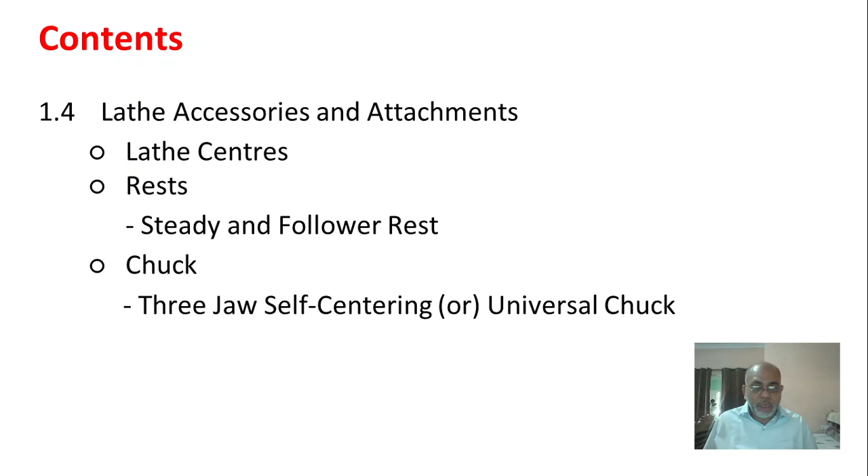I am going to present today the topic of lathe accessories and attachments. Here, lathe accessories and attachments, then lathe centers, then rest, then steady rest and follower rest. Then we have got chuck, three-jaw chuck, self-centering chuck, or it is also called as universal chuck.

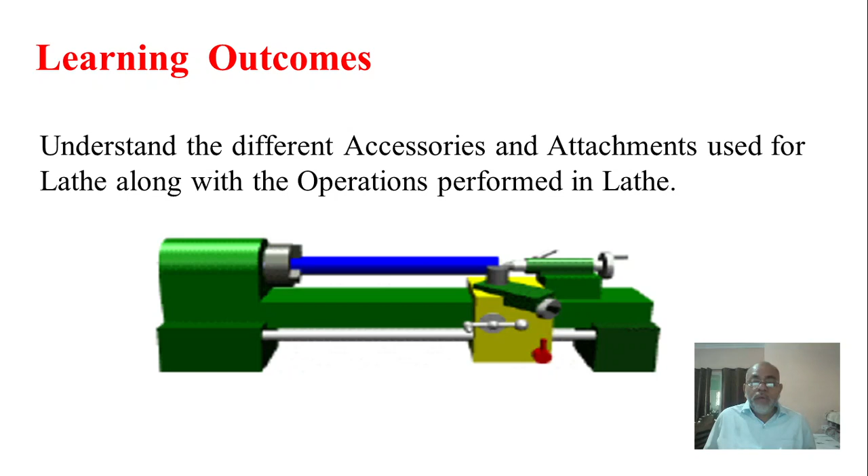So today, what are the learning outcomes? We will understand the different accessories and attachments used for lathe along with the operation which we are going to perform in a lathe. First, what are these lathe accessories and attachments? Whenever we purchase a lathe, the supplier will always give us accessories and attachments along with the lathe.

The lathe accessories are used for holding and supporting the work or for holding the tool during doing some specific operation. These include centers, catch plates, carriers, chucks, collets, angle plates, mandrels and rests.

Then attachments. What are these attachments? The attachments are additional equipment used for specific purpose. They include stops, thread chasing dials, taper turning, milling, grinding, gear cutting, turret, etc. When we are doing some specific operation, we make use of accessories and attachments.

We have got a headstock in a lathe and a tailstock also. The headstock is always located at the left side of the lathe, whereas at the right side we have got the tailstock. We are holding the job in the headstock or the chuck. In the headstock we have got the chuck and there we are holding the job. At the right side we have got the tailstock, that is also known as the dead center.

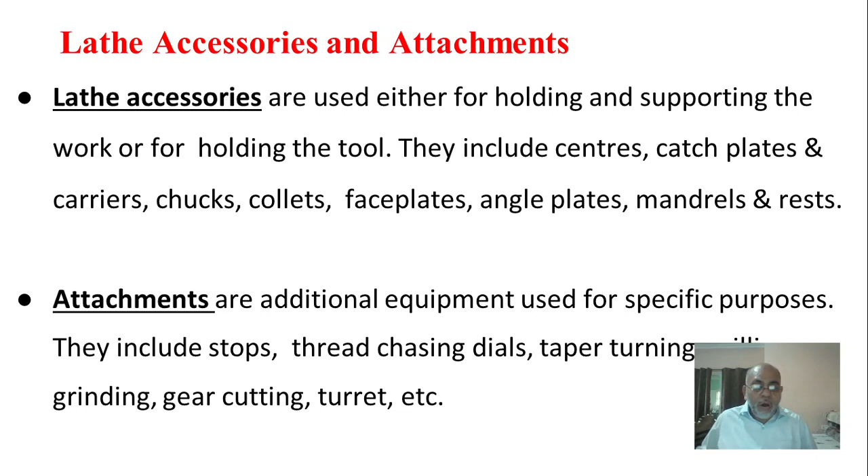Then we will go for attachments. Attachments are additional equipment used for specific purposes. They include stops, thread chasing dials, taper turning, milling, grinding, gear cutting, turret, etc. With the help of these attachments, we can do all these operations. These are also incorporated in the lathe.

Then what are these lathe centers? The most common method of holding the work is between the two centers, as I have told you earlier, that is between the live center and the dead center. The live center is at the headstock, the dead center is at the tailstock. Live is left side, dead is towards the right side. In between these two, we hold the job and do some specific operation.

The tool is fed perpendicularly and we do any operation, like turning, knurling, facing; all those operations can be done. These two centers will take up the thrust load due to metal cutting, and the entire load of the workpiece is on a small bearing surface, so they are made up of very hard material to resist deflection and wear.

The work is rotating with certain RPM, so a lot of heat is generated. That's why these are made up of very hard material to resist deflection and wear. They should not get worn out; that's why they are made up of a very hard material.

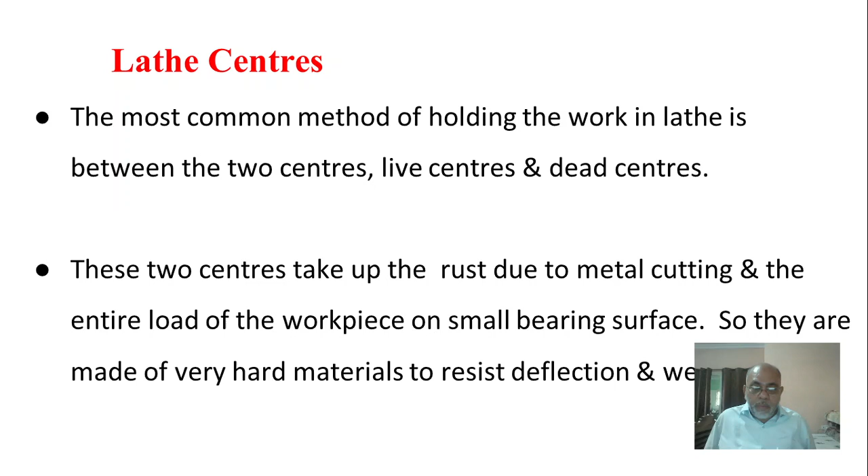Now, what are the different types of centers we have got? Here we have shown you the different centers. One is the ordinary center, then the half center, the ball center, the revolving center, insert type center, square center, stepped center, as well as other centers.

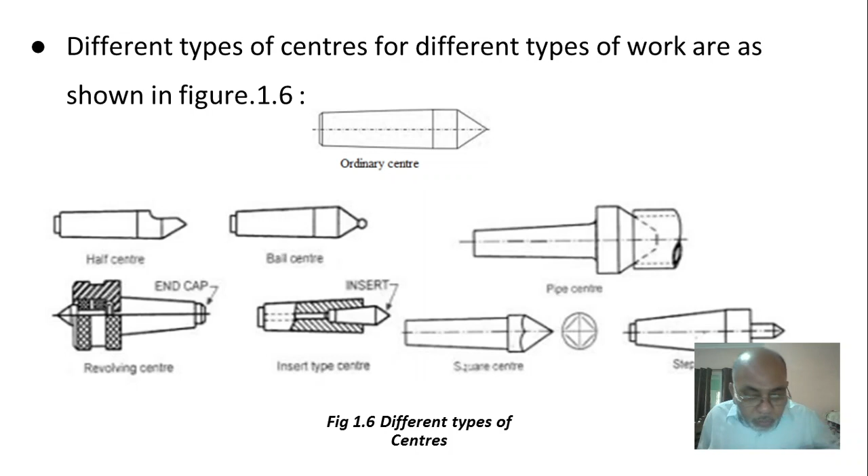The ordinary center is a type of center used for the most general work. The other center is the ball center. The ball center is used to minimize wear and strain at the ordinary center. These centers are fixed at the dead center, towards the tailstock. Next is the frictionless center. The frictionless center is always used in the tailstock for supporting heavy work revolving at high speed.

When the RPM of the headstock is more, we make use of the frictionless center. Then we have got half centers also. Then we have got tipped center.

In a tipped center, the point consists of a hard alloy tip brazed into an ordinary steel shank. Brazing is an operation which will hold the tip to the shank. This is a more expensive type, but it has excellent service against wear and strain. Though it is costly, the life is more.

Then we have got insert type center. This is used for reasons of economy, as only the high speed steel (HSS) insert can be replaced instead of replacing the whole center. The whole center cannot be made out of one material, as it will be very expensive. So what we do is make only the tip of HSS, whereas the rest is made of a cheaper material for economy, thereby reducing the cost.

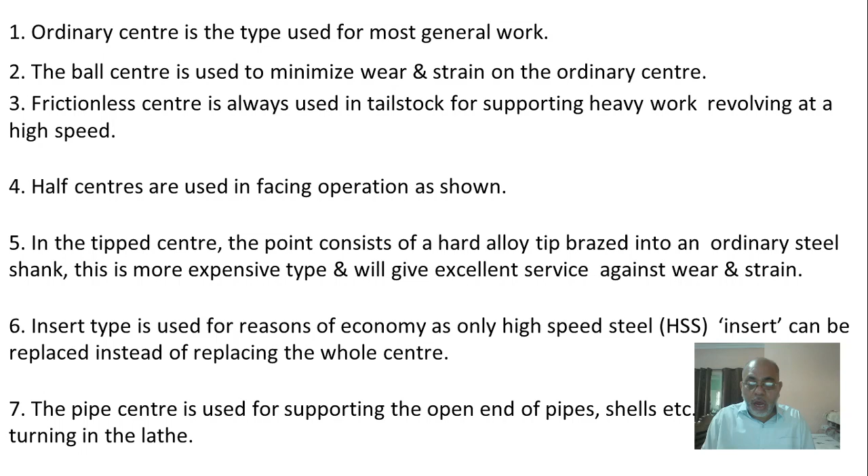Then we have got the pipe center, which is used for supporting the open end of pipes, shells, etc., for cutting or turning the job on a lathe. Then we have got rest.

We have got two types of rest, that is steady rest or follower rest. A rest is a mechanical device which supports a long cylindrical workpiece turned between the centers, at some point, to prevent bending of the workpiece due to its own weight and vibration set up due to cutting force.

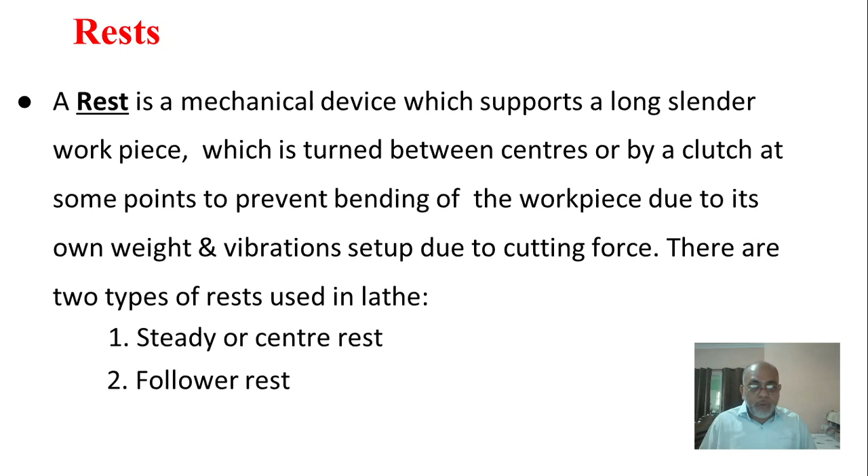When we have a long piece, deflection will be there, so it should perfectly rotate on its own axis. Different supports are given on the rest, and the workpiece is supported between them. So we have got two types of rest: one is the steady rest and the other is the follower rest.

The whole material is made up of cast iron, which may be made to slide on the lathe bed ways. The lathe bed ways is also made of cast iron, and even the steady rest is made of cast iron. These are clamped at any desired position where support is necessary, wherever we want.

Then all 3 jaws are adjusted radially by rotating individual screws to hold workpieces of different diameters, depending upon size and specification. The main function of this rest is to provide support to a long cylindrical work. It can also be used to support the free end of the long workpiece.

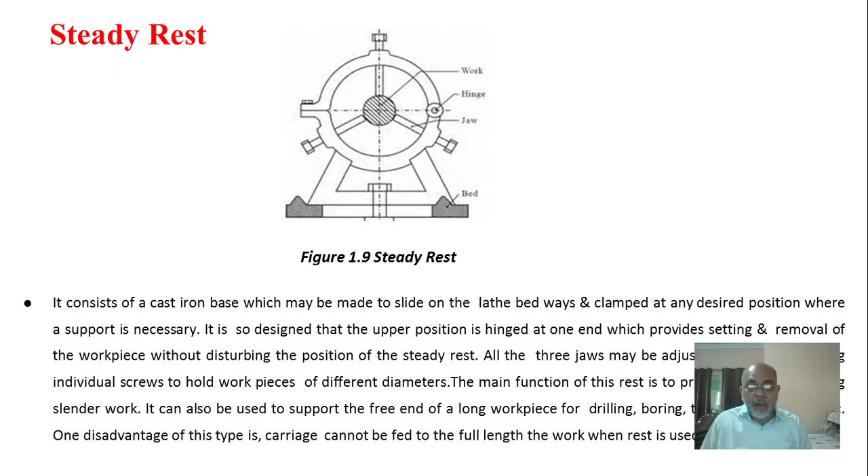One disadvantage of this type of rest is that it cannot be fed to the full length of the work when the rest is used. Then we have got follower rest.

Whereas in the previous rest we saw 3 jaws, here we have got only 2. This rest is like a C-shaped casting, like the alphabetical letter C. It has 2 adjustable jaws which support the workpiece.

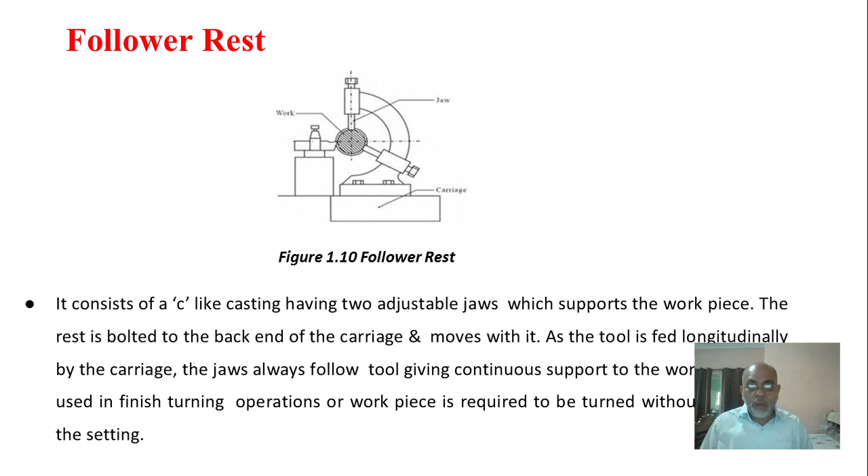This rest is bolted to the back end of the carriage and moves with it. As the tool is fed longitudinally by the carriage, the jaws always follow the tool, giving continuous support to the workpiece. This is used for finishing operations on a workpiece which needs to be turned without disturbing the whole setting. Now we'll go to chuck. A chuck is one of the most important devices for holding and rotating a piece of work of any irregular shape which cannot be mounted between the centers.

Now the chuck is near the headstock. The headstock is attached to it. It is the important device for holding and rotating a piece of work of any irregular shape which cannot be mounted between the centers. The centers mean the live center and the dead center.

Now we have got different types of chucks which I have listed here. One is the 4-jaw chuck, where we have got 4 jaws, and all the jaws operate independently. Then we have got the 3-jaw universal chuck, in which all the 3 jaws operate simultaneously.

Then we have got the air or hydraulic operated chuck, operated either by air or hydraulic. A system which works on fluid is known as hydraulic, and the system which works on compressed air is known as pneumatic or air. Then we have got the magnetic chuck.

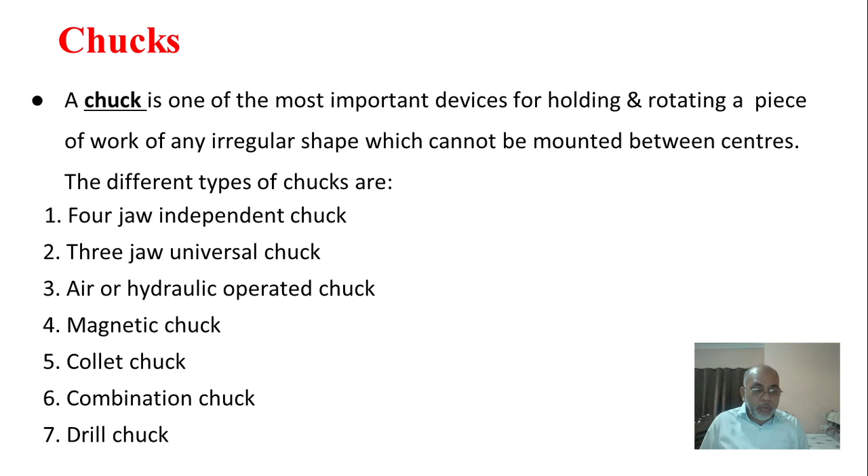Then we have got the collet chuck, then the combination chuck, and we have got the drill chuck. Let us study what is this 3-jaw chuck.

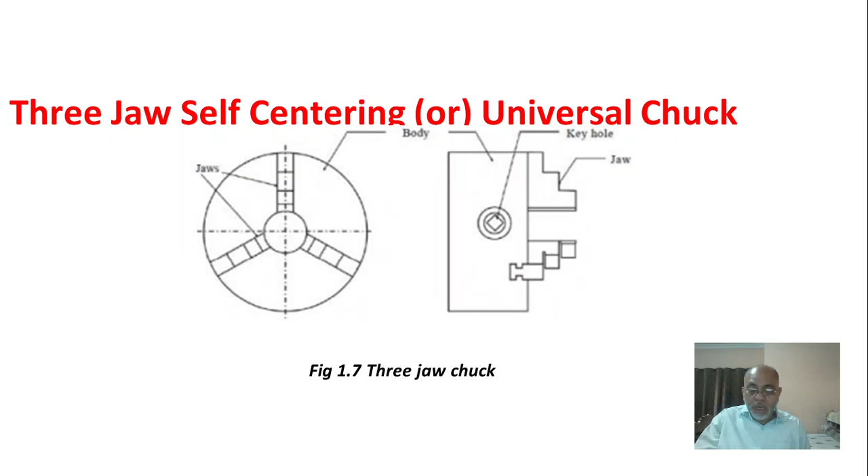Now, as I have sketched here, we have got three jaws. As I told you earlier, all three jaws move simultaneously. Three jaws are there, the body is there, two views are there. You can see from the sketch what these two views of the three-jaw chuck are.

As shown in the figure, all the jaws slide simultaneously by an equal amount within the slots provided on the body. So in the body we have three slots, and by rotating any one of the three pinions which meshes with the teeth cut on the underside of the scroll disc — at the back side we have a disc known as the scroll disc — the scroll disc has spiral grooves cut on the top face which mesh with the teeth on the jaws.

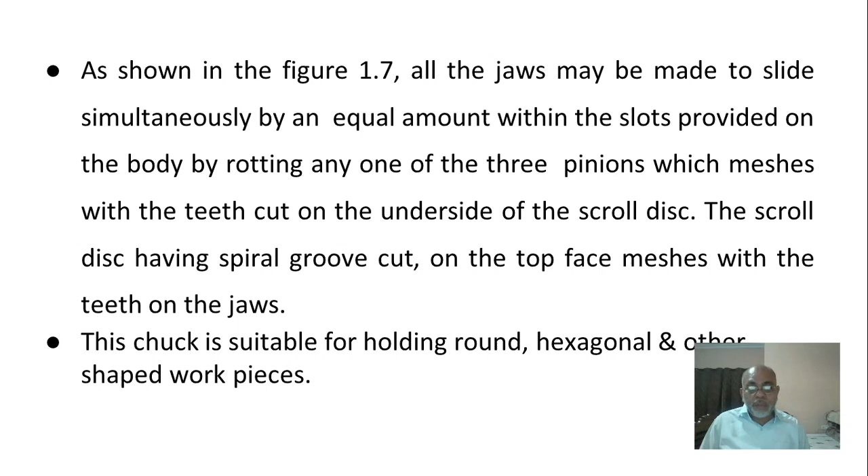Now this chuck is suitable for round jobs; hexagonal and other shaped jobs can also be held.

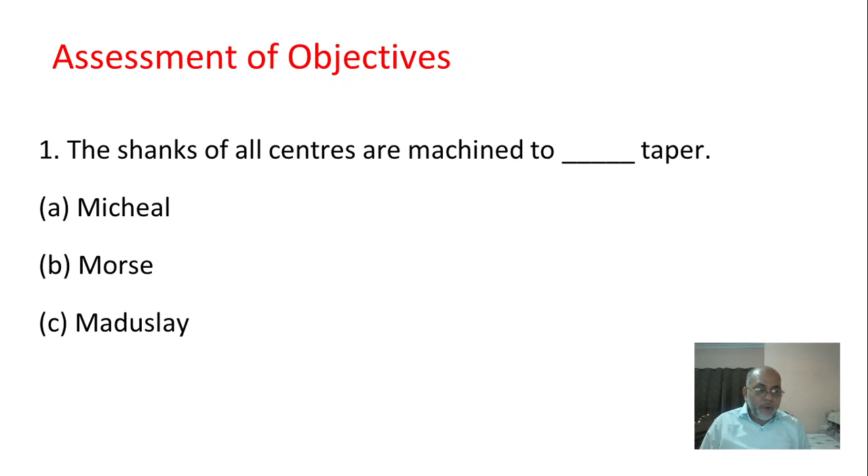Now we will discuss some assessment objectives. The shanks which were discussed about the centers — now the shanks of all centers are machined to a dash taper. Here we have given three answers: one is Micheal, Morse, Maduslay.

Then the next: a dash is a device for holding and rotating a piece of work in a lathe. Three options are given here: A is carrier, B is catch plate, C is chuck.

Then the fourth one: a dash is used to rotate a hollow piece of work. We have chuck, carrier, mandrel.

Then the fifth one: a steady rest consists of a dash iron base. Three options are given again here: wrought iron, cast iron, pig iron.

Next, a follower rest consists of a dash-like casting having two adjustable jaws — options A, B, C are given. You can go check this.

The dash center is used for most general work, which we discussed earlier regarding centers. We have a tipped center, a ball center, and an ordinary center.

Then a dash is a mechanical device which supports a long cylindrical workpiece turned between centers. Three options are given again here: A is rest, B is carrier, C is mandrel.

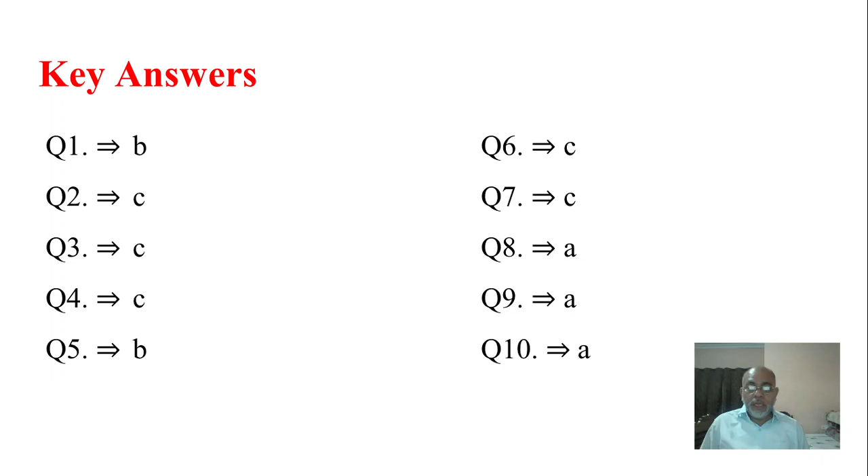So our key answers are also given. I'll read out the answers: Question 1 is B, question 2 is C, 3 is also C, 4 is C, 5 is B, 6 is also C, 7 is also C, 8 is A, 9 is A, 10 is A.

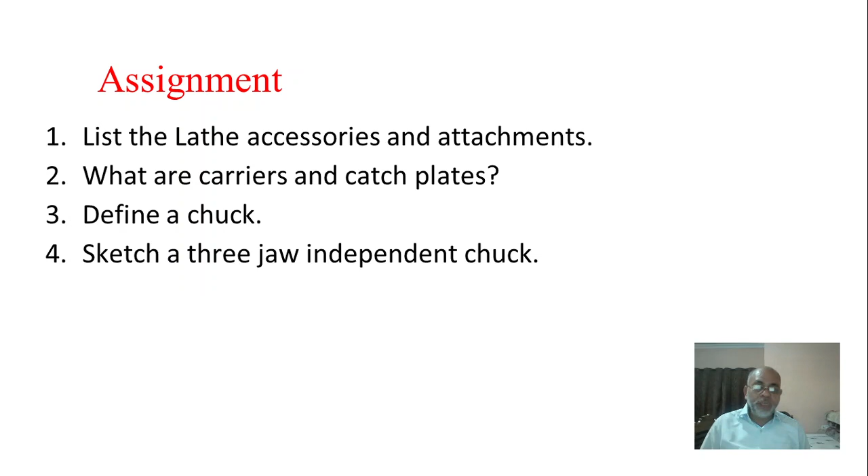So here some assignments also I have given. Try to answer this assignment. Question 1 is: list the lathe accessories and attachments. What are the accessories and attachments? Go on listing it. Then what are carriers and catch plates? Then define a chuck. Then draw the sketch of a 3-jaw independent chuck.

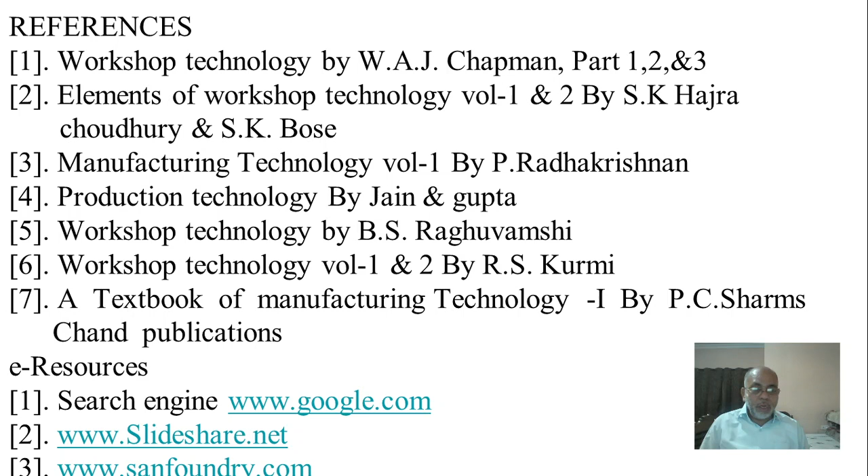Some reference books also we have given here, you can go through this. One is Workshop Technology by W.A.J. Chapman, Part 1, 2 and 3. Then Elements of Workshop Technology Volume 1 and 2 by S.K. Hajra Choudhury and S.K. Bose. Then we have Manufacturing Technology Volume 1 by P. Radhakrishnan, and Production Technology by Jain. All the things have been given. You can refer to this. Thank you.